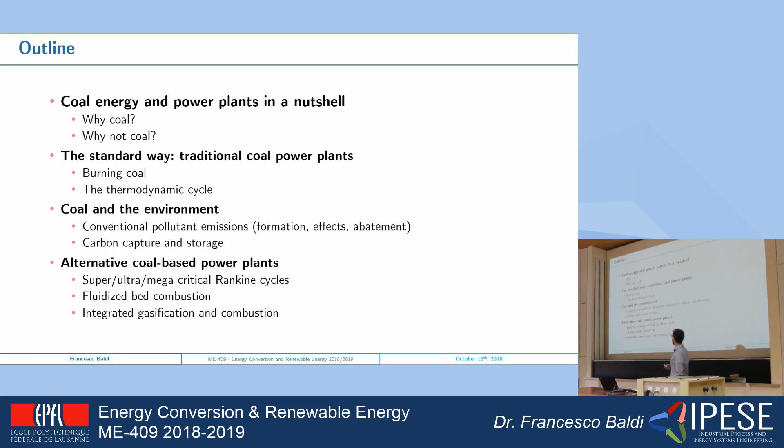And then we will move into how it actually works, how it works to burn coal and what is the thermodynamic cycle behind it. We'll look a bit into the environment, because as we will see later, the environmental concerns related to coal is one of the main reasons why we should not look too much into coal. And then we will have a brief overview of the future technologies that will hopefully make coal a bit better, coming in the few years to come.

So to start, just as an idea, today 40% of the electricity globally is produced by burning coal. So coal is quite an important means for energy production today. I put a quantification, it's 160 quadrillion BTU. It's not easy to say what it means in practice, but I would say that is a lot.

Luckily, coal is not expanding. We are seeing that in some countries, particularly in Europe, and in general in countries like the US, we are phasing out slowly coal. But on the other side, in growing economies, coal is becoming more and more important. So the overall trend is more or less constant.

We see already one of the reasons why coal is still there: it's because there is a lot of it. The total duration expected for the coal reserves today is almost 200 years, and there are some parts of the world in which it is even longer, of course.

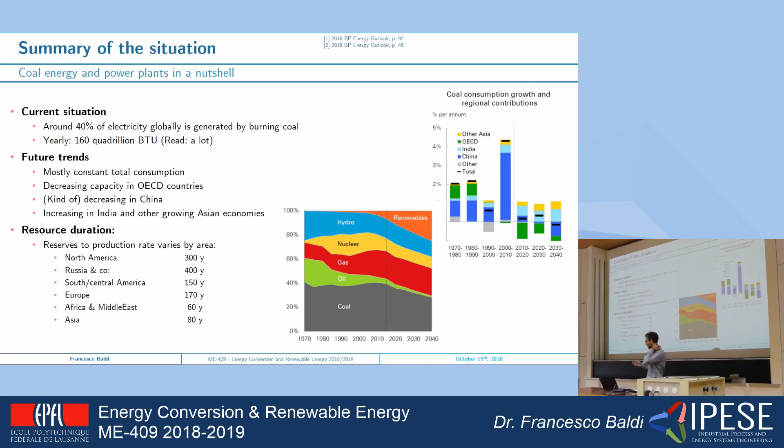When we look at the situation in Europe, we see that it's very variable, but there are some countries, typically those that have a lot of coal reserves, like Poland, Germany and Czech Republic, that rely heavily still on coal power production.

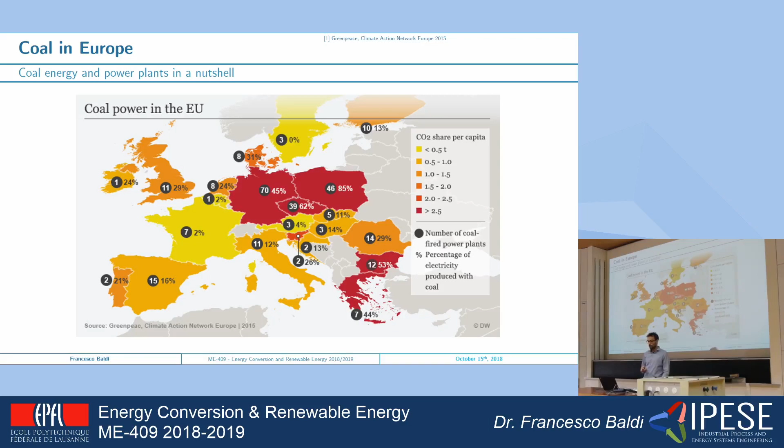So why coal energy? Well, we said it a bit already. Probably the main reason is that coal is cheap. It's been, and it is still today, very cheap to produce energy using coal. As a matter of fact, regardless of our convictions related to environmental impact and so on, many times it boils down to using the cheapest option, and that's why coal is still there a lot.

One other reason, a bit more interesting I would say, is that it is very widespread. There are many countries who can rely on their own coal reserves. Politically that is a strong point, for example differently from natural gas or oil that are located in some specific parts of the world, and not necessarily the most stable ones. Coal is available, as you can see here on the map, coal is available a bit everywhere.

Furthermore, coal, we will see later the power plants, but coal has been used for many years, and we know that it works.

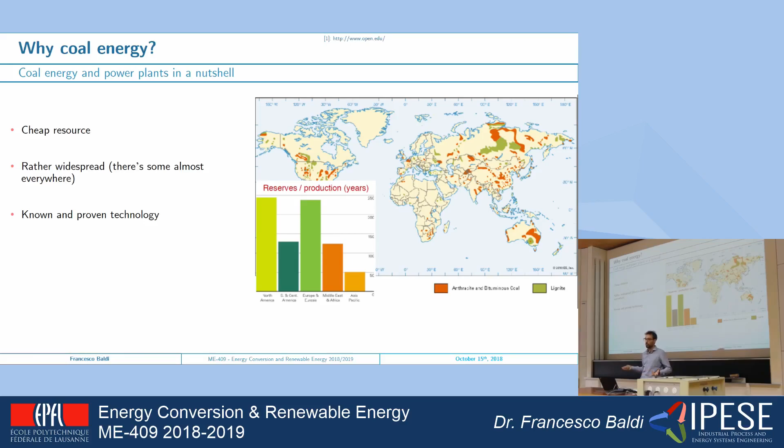When it comes to the why not, well, the main reasons are related to its impact on the environment. So yes, as we said, there is a lot of coal left. Still, it's a fossil resource, so it means that one day it will end, which in itself still says okay, we can still use it, but we should at a certain point get rid of it. And then the main issues are related to CO2 emissions.

As you can see from the table here, every kilogram burned, getting one gigajoule of energy from coal generates between 80 and 100 kilograms of CO2. While, for example, natural gas, which is still a fossil resource, only generates 56. And of course we are still emitting CO2 anyway. That is a big problem, as all of you I guess know.

And with coal particularly, we have a lot of other problems related to other pollutants: nitrogen oxides, sulfur oxides, and particulate matter in particular. We will see them a little bit later, and the reason why we see them for coal power plants is because coal, among all energy sources for electricity production, is the one that has the most problems related to these other pollutants.

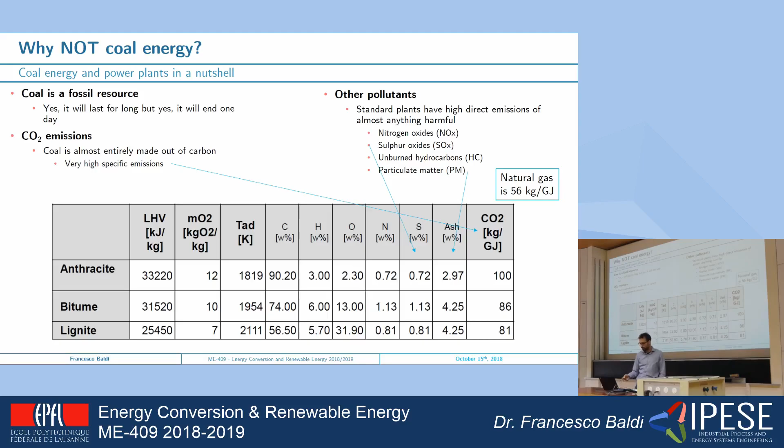So, how does a coal power plant work? In itself, it's pretty simple. You have already seen the Rankine cycle, and it is exactly what we have as the basic thermodynamic cycle for this type of power plant. From the coal storage, we have a furnace where the coal is burned and generates heat that is transferred to a heat transfer fluid, normally steam. The steam goes through a turbine where it expands, generating mechanical power that is converted to electricity. The water is condensed, pumped again, and the whole thing starts over.

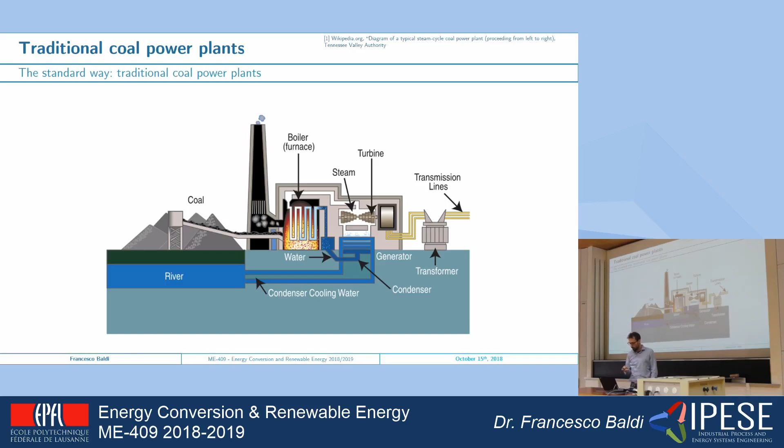So nothing strange here. We will not go much into the properties of coal, or how a furnace works. There will be in principle a lot of knowledge behind it, but in practice, what we need to know is that they are very big things.

What we normally do in traditional power plants today is inject coal in powder form, kind of dust, very fine. This needs very dry coal, because it first has to be grinded and then blown into the combustion chamber.

We have different configurations, but the idea is always the same. It is blown inside, basically into the fire that is already there because there are already things burning. They are transported away through the furnace, and in this short residence time, these small particles of coal burn. By burning, they release the energy that we need.

The heat generated during combustion is normally transferred in two main ways. The whole furnace is normally surrounded by pipes with water and steam flowing inside. The heat radiating directly from the combustion goes to the steam, to the water on the outside, and makes it boil from water to steam.

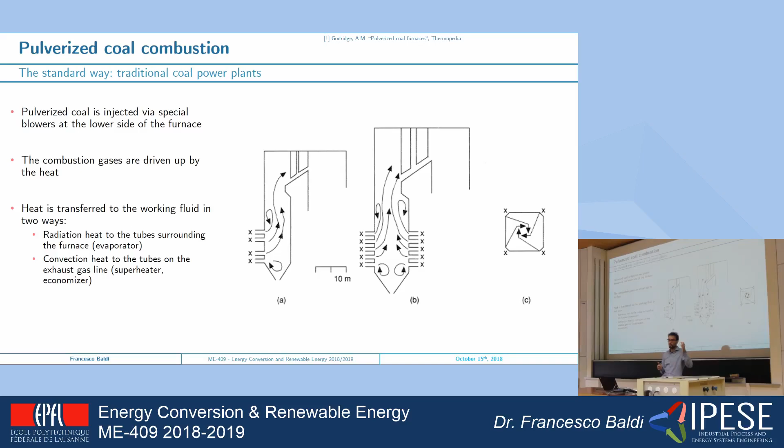Then we have the exhaust gas leaving the combustion area that is still very hot. It goes through a battery of heat exchangers located up there normally, the economizer and the superheater, so the coldest and the hottest of the heat exchangers.

As we said, when it comes to the thermodynamic cycle behind, it is a Rankine cycle, but not the most simple one. As you have seen in the lectures before, the simplest version of the Rankine cycle, simply evaporating once and then expanding, can be improved in terms of efficiency by a number of measures. Since in coal power plants the cost of buying fuel is one of the most important during the operational life of a plant, we want to make the plant efficient. So we use all those possible means to make the thermodynamic cycle more efficient.

In this type of power plant, we have not only superheated steam, which is needed for efficiency but also for the integrity of the turbine, but also reheating. The steam is first expanded at intermediate pressure, then heated again at high temperature, and then expanded again.

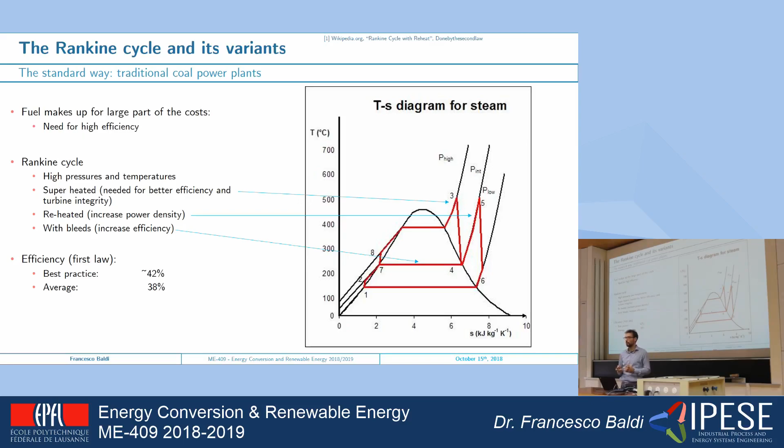Okay, so that was the first part. Now we dig more into the bad aspects about coal, because so far we have said that it burns in the combustion chamber, it works pretty well, it has a decent efficiency, coal is cheap, fine. What is the problem then?

There are three main emissions that we focus on when we talk about coal power plants. They are not the only ones, but they are the most dangerous and most important: sulfur oxides, nitrogen oxides, and particulate matter. For all of them, during this part of the lecture, we will see what is the formation mechanism, so how are they actually formed, what are the effects both on the environment and on human health, and what are the ways to reduce these emissions.

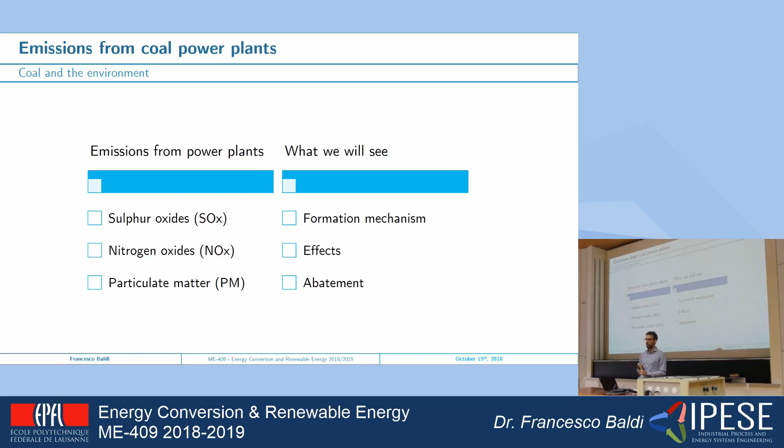Okay, this is quite a heavy content slide, still more questions, I hope you're happy with that. So the first one, sulfur oxides. Its formation mechanism is very simple: if there is sulfur in the fuel, that sulfur will become sulfur oxide at the end of the combustion, because sulfur prefers to be in its SOx form.

Most of its negative effects are connected to the effects on the environment. We're talking mostly about acid rain. So what happens is that the SO2, for example, in the air, reacts with water and forms H2SO3, which is an acid, that then condenses with the rain and comes down.

In its mildest form, it's going to basically consume marble monuments, which is kind of a problem in the country where I'm from, in Italy, where many monuments are in marble and are heavily damaged by acid rain. In general, it can basically melt down forests, it makes the soil acid, so it's quite a bad effect on the environment, and it's one of the first ones that has been tried to take action on.

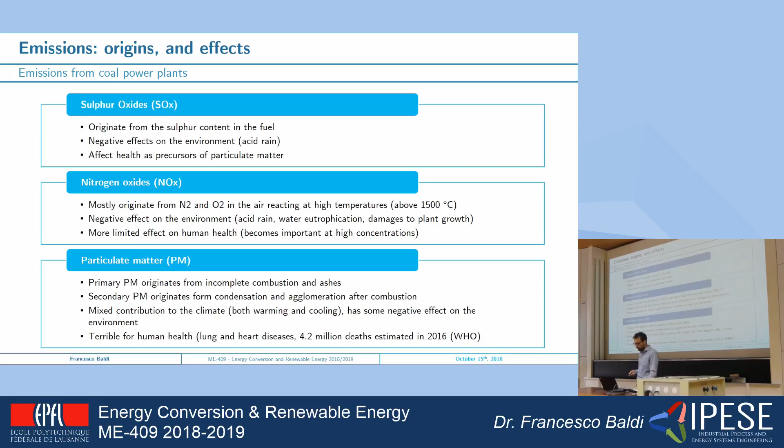So, a lot of bad stuff. How do we deal with it? First, sulfur oxides. There is one technology—in principle there are many, but we don't have time, so we'll talk about the most common one by far. It's basically a shower: we wash the exhaust gas in a shower.

So how does it work? The water that we spray on the exhaust gas reacts with the exhaust gas itself. We don't just put water in this scrubber, we put water with, normally, limestone dissolved in it. What happens is the reaction you see here: we have the limestone, which is calcium and a carbonate ion, and basically the two ions switch. So from CaCO3 plus SO2, you get CaSO3, which is basically gypsum. You can collect it at the end, with CO2 going out on the outside.

This way of reducing emissions works very well, with a very high efficiency of reduction. You need a reactant, so you need limestone—you buy it—and in some cases you can even sell the product. Gypsum can be sold for different uses, for construction material and so on.

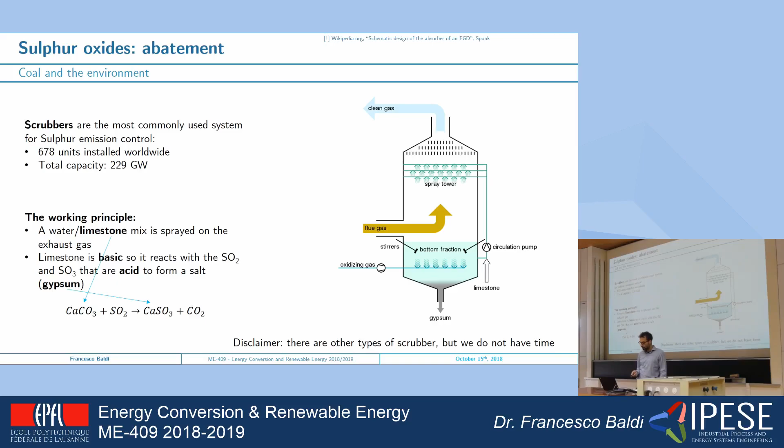Nitrogen oxides: in principle this sounds easier because nitrogen and oxygen prefer, in normal conditions, to be on their own, in the form of N2 and O2. In practice this would be very slow, too slow for our taste. So we need three things to make them go back to the original form. One of them is ammonia, because we don't just let NO separate on its own—we provide something to generate the reaction that we're interested in, as you can see there.

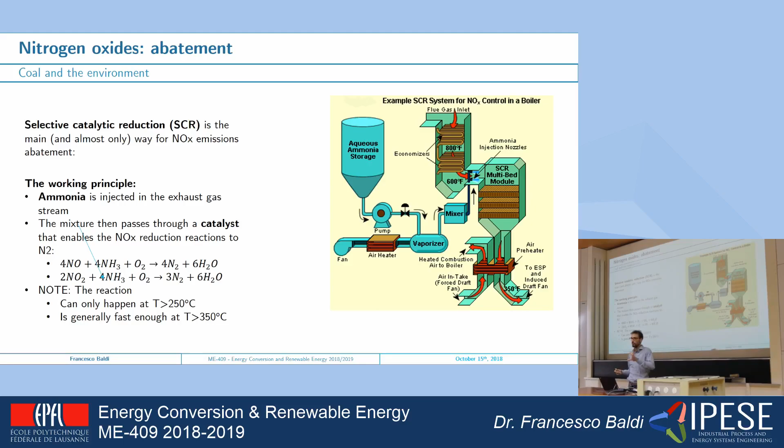This reaction needs temperature, so it can only happen at relatively high temperature, and it's only fast enough if we use a catalyst. That's why these components are in systems called SCR, selective catalytic reduction—reduction because it's the opposite of oxidation, and catalytic because we have a catalyst in there. The tricky part is that it has to be at high temperature, so we can't put it just anywhere on the exhaust gas path; we have to put it at a point where the exhaust gas is still sufficiently hot for this to happen.

Last but not least, particulate matter. One could spend hours talking about how to reduce particulate matter emissions, but we normally have three main strategies.

One of them is to simply use the fact that particles are heavier, so we use a separation system based on inertia. Typically, cyclones make the exhaust gas rotate, and by rotating, the particles that have more inertia tend to stay on the outside.

Then we also have the fact that many of these particles at high temperature become electrically charged, so we just make them go through an electric field. They will be attracted to the two sides depending on how they are charged, and then we scrape it out.

And finally, we have fabric filters that are just like giant socks. The exhaust gas goes through them and it basically gets stuck. It's very simple to understand.

The thing that is a bit more interesting is that the filter bag itself is not what really does the filtering. What does the filtering is the layer of particulate matter that gets stuck on it. So when the filter is clean, as crazy as it might sound, it doesn't work very well. It works best when it has already been used for a while, so there is a layer of particulate matter stuck there that is doing the filtering.

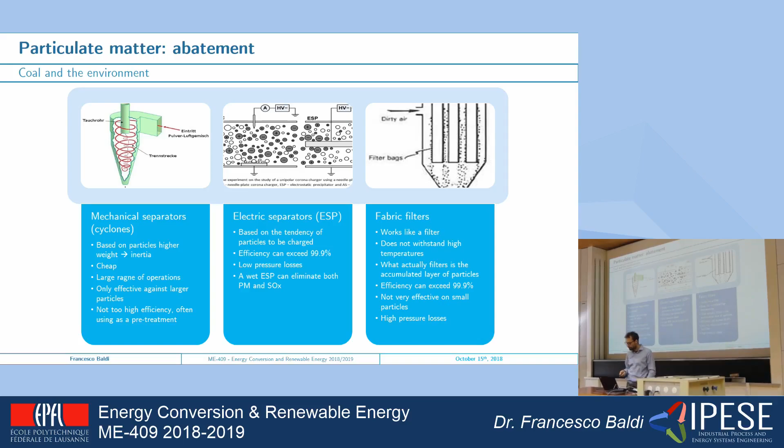In practice, we will have all of these combined. Normally we have in the beginning a cyclone to take away the largest particles, the big bunch of particulate matter. Then we have an SCR for reducing nitrogen oxides while the exhaust gas is still at high temperature. Then we have the more effective particulate matter reduction, either fabric filter or electric separation. And then at the very end, the scrubber, because it humidifies the air, so it's really the last thing you want to do.

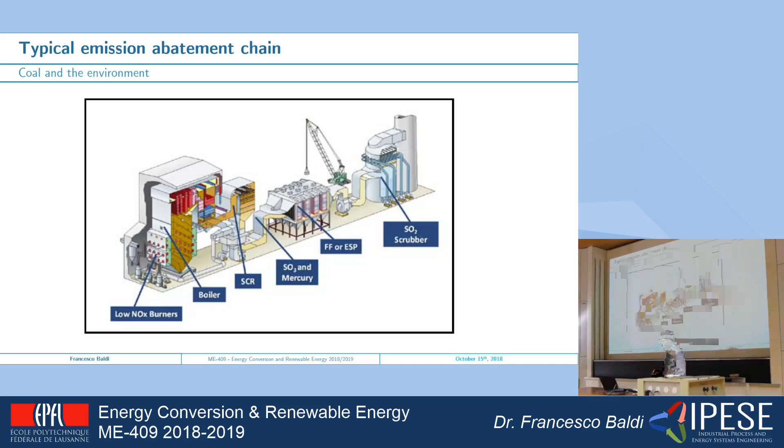Okay, the last part of the lecture: alternative coal-based power plants. The new ones, the ones we are using to do clean coal, as Donald says.

The first one is a rather simple concept: just taking the existing plants without changing anything, but making them more efficient. In the combustion chamber you have very high temperatures. If we talk about a normal Rankine cycle with maximum pressures of 160 bar and a maximum temperature of 540 degrees, we can do better than that.

We can go up to the point of supercritical steam, beyond the critical temperature and pressure of water, really pushing up the pressure. If 160 bar is already a high pressure cycle, this one becomes really high, 320 bar. By having higher pressure, higher temperature, and a smoother heat exchange profile, we can go up to 50% efficiency.

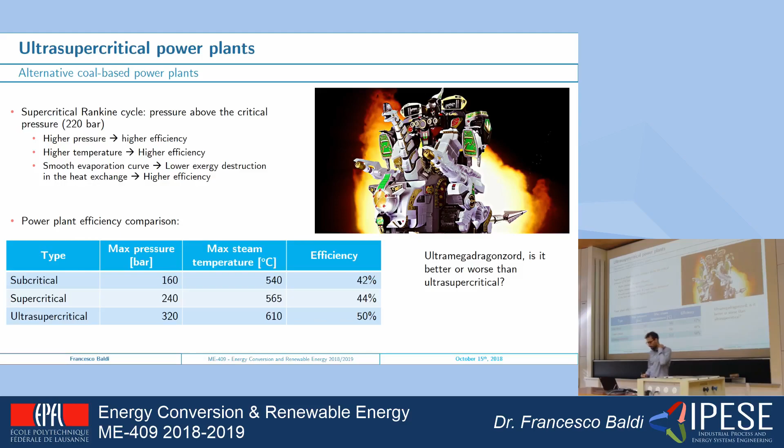The second way is fluidized bed combustion. If you remember, John Oliver mentioned it before, in the list of things Donald Trump is supposedly an expert in. The idea here is that we change the way we do the combustion.

We won't go into the details of how it works, but instead of having very fine coal that goes in and is quickly burned while flowing through the combustion chamber, here we have big chunks that go into a fluidized bed, which bubbles around. The coal stays on this gaseous grill until it's burned down small enough that the air blowing from the bottom, which creates this bubbling bed, pushes the small remaining part out.

Why do we do this? There are some reasons. The rest is very similar to a normal power plant. The only thing is that in the fluidized bed we don't only have fuel, we normally have other things, particularly some sand that is there to increase heat transfer, which is put back and recirculated.

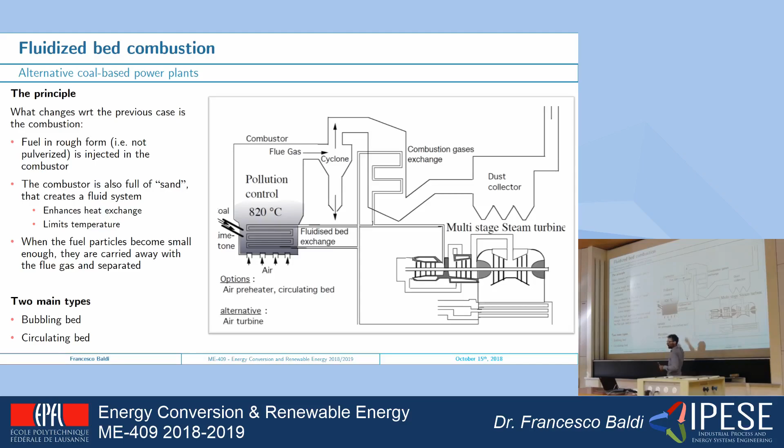So what is the point here? First of all, in this type of system, the combustion temperature is kept low because of the sand and how it's designed. By having a low temperature, you don't allow the temperatures required to generate NOx emissions, so you don't need an SCR. You just basically don't generate NOx.

Since we have this kind of sand in between, you can also put limestone directly in the combustion chamber. The limestone will directly react with sulfur, so basically you don't need to put a scrubber at the end because the sulfur oxides are eliminated directly in the combustion chamber.

Finally, since you can have larger pieces because they stay there until they are consumed, it's easy to burn bad quality coal, like coal that is more humid and difficult to make into powder, and it even allows co-combustion with biomass. So you can easily have, for example, 50% biomass and 50% coal. In general, the problem is that these systems are a little bit more expensive, less efficient, and more difficult to operate and control.

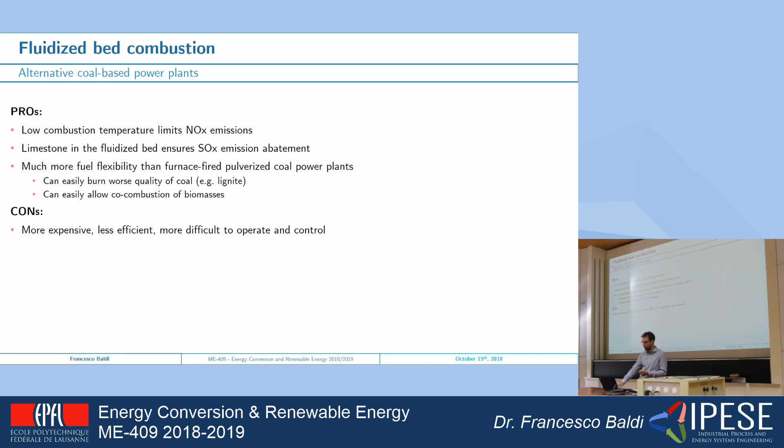The last one is basically integrated gasification plants, where we don't burn coal anymore. We take the coal and gasify it. When we gasify, it means we let it stay at high temperature in the presence of other agents, particularly steam, and the high temperature generated by burning some of the coal makes the lightest part of the coal release, and by reacting with steam it generates a gas mixture made of CO, H2, CO2, and H2O — water, carbon dioxide, carbon monoxide, and hydrogen.

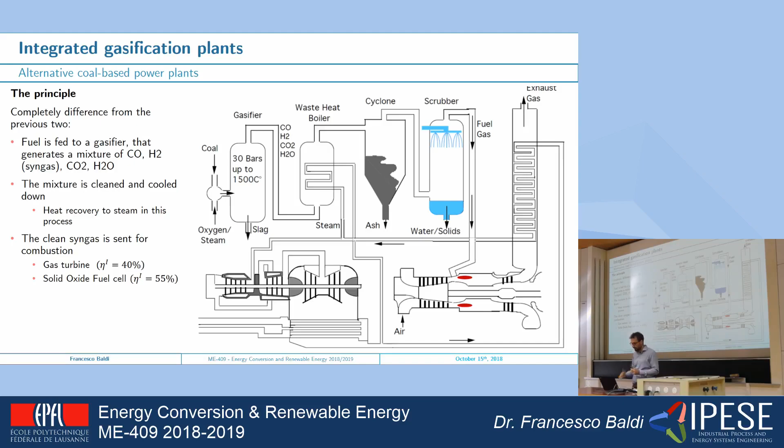That mixture is normally very easy to filter out and separate. So the control of pollutants happens before combustion, and then we have a clean gas that we can use either in a combined cycle, with a gas turbine and then a steam turbine, or even in a fuel cell. The idea is that with this type of system we get very efficient and quite clean systems. Also, probably the most interesting thing about this type of system, is that capturing CO2 is easier and cheaper when you do gasification first.

You will have a lecture about carbon capture and storage. As we said, one of the main problems of coal is CO2 emissions. The fact that we can separate CO2 and collect it somewhere more easily with this type of system is a big point forward, especially looking into the future.

As you see here, this is an estimation I took from a report from MIT that says integrated gasification is 5% more expensive than normal pulverized coal power plants. But when we look at a system with carbon capture, that already becomes much more expensive quickly — the standard system is 60% more expensive than the no carbon capture one, but the IGCC is only 30-35% more expensive.

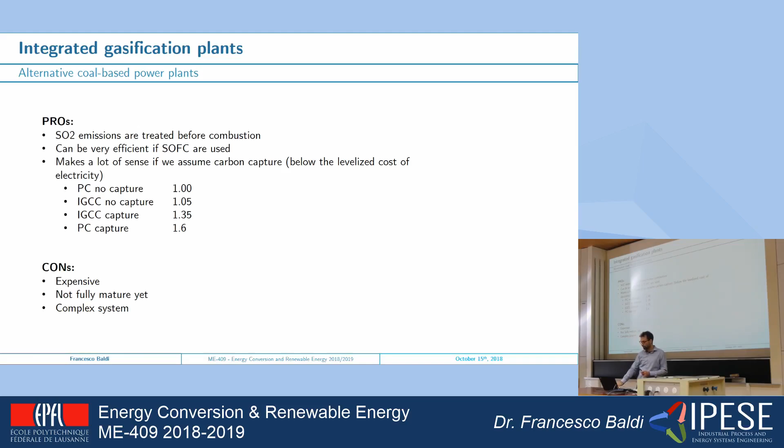Last thing, as Stefano introduced before, you will have this project to work on starting next week, if I remember correctly. In this project, we will have to introduce technologies based on a number of their features, and the ones for coal are summarized in this slide. You will have the slides available, so just to let you know this is there.

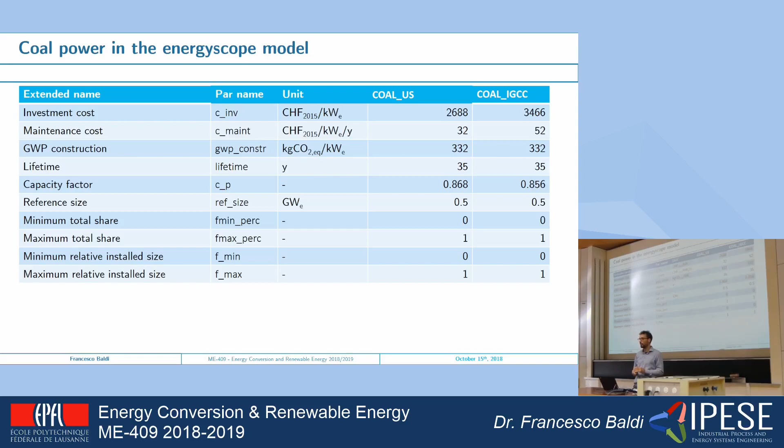So to conclude the lecture, coal is dirty. We know it. On the other hand, we know it is here and it is here to stay for a while, because it is a known technology, because it's cheap, and because there's a lot of it. Coal has a lot of negative consequences on the environment and human health, particularly because of nitrogen oxides, sulfur oxides, particulate matter, and CO2.

But there are some things we can do to at least mitigate these effects, and we have seen all the different components that are used and can be used. Finally, we went quickly through a couple of new technological developments that can maybe bring some solutions, particularly very high pressure and temperature ultrasupercritical Rankine cycles, fluidized bed combustion, and integrated gasification. Bottom line: coal is bad, but could be worse.